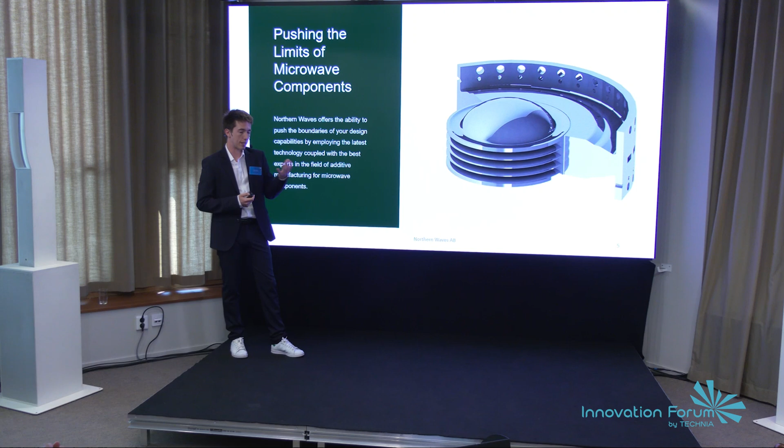So that's why I started the company Northern Waves, to try to push the limits of this system and to try to realize whatever you have in mind, because you are not limited anymore to the design or to the traditional manufacturing techniques. You can have new shapes, you can have new possibilities that come out of your mind that were not even possible before. And many of our clients, we're working with aerospace companies, also defense, like Viasat, Ericsson here, Saab, Fraunhofer in Germany, and also with a lot of universities that are pushing and actually innovating in the European framework.

The products that we're offering now are a combination of different metallic components. So we're covering geodesic lenses for 5G and 6G networks. We're also doing horn arrays and geodesic horns, mainly for aerospace and then different sectors. We are doing a lot of ad-hoc components. Since we are doing additive manufacturing, we can be quite adaptive to our clients' needs. And we're also doing a lot of waveguides for testing facilities.

What we are offering as a company is, apart from whatever you have in mind, try to build it. We are adapting components that you already have in your product line from traditional techniques to additive manufacturing. We are using cutting-edge technology to create and to craft these designs. We are also designing from scratch. So if someone asks us, okay, we need to have this component for this specific application, we are designing and covering from the simulation of the electromagnetic to the mechanical design. We are also building and testing. So we offer the whole process.

Now, I would like to jump on how the components are done now. There are three main techniques. One is subtractive, which is the typical CNC milling. You have a big block of metal, and you start cutting the material. This is well spread. You have a lot of different materials. It's well established in a lot of different sectors, but it's a lot of material waste because in the end, you have a big block of metal and you start cutting and making a lot of waste. It is limited in terms of design complexity, and this is the worst part of this technology. You are putting constraints on the designers, so you are not innovating enough.

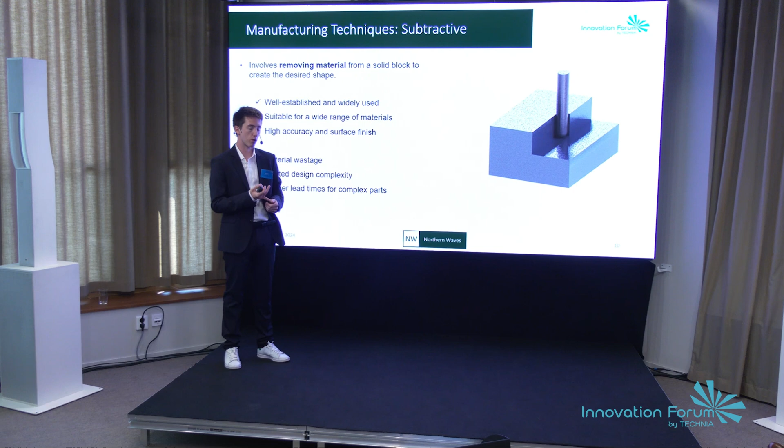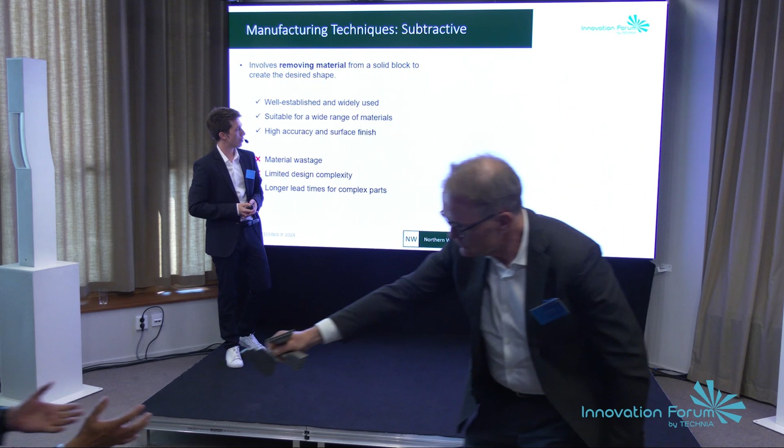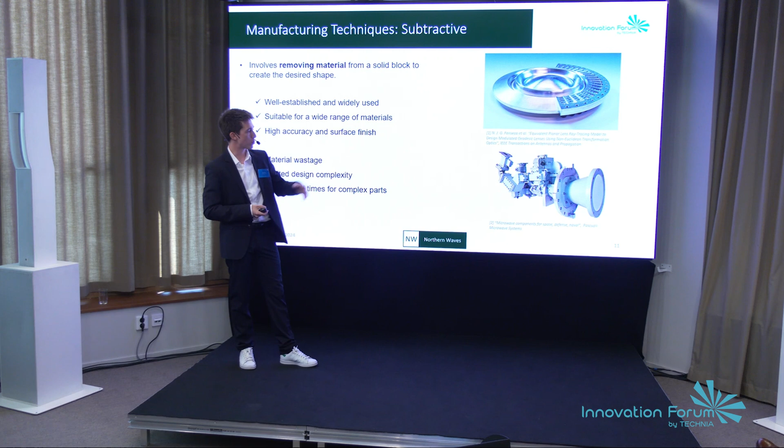Next technique is called casting. It is well spread. Basically, you have some mold where you put some melted material inside, and it solidifies to create the desired structure. You have a lot of different materials, you can use plastic or you can use metal. But the problem in this technology is the initial cost of the tools are really, really high, so if you're not going to make millions of units, it's not really your choice.

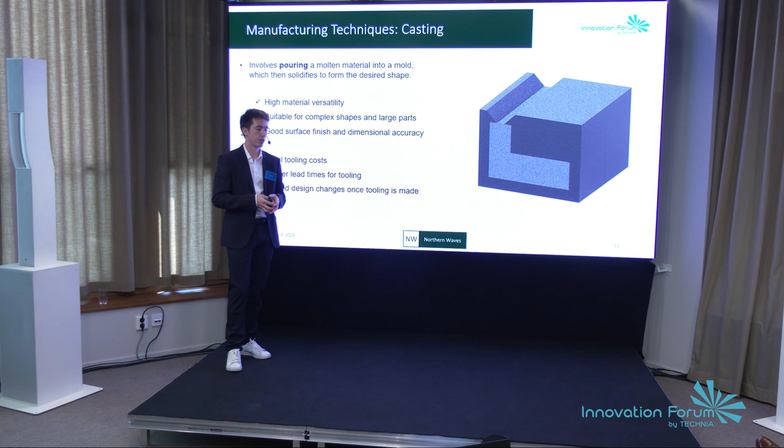And finally, the technology that we're expert on is called additive manufacturing. In this case, you don't have anything on your building plate, on the platform that you're building. You start adding by layer deposition of different materials, dielectric or metallic, and then in some way you are solidifying or bonding these structures together. It is way faster than other technologies.

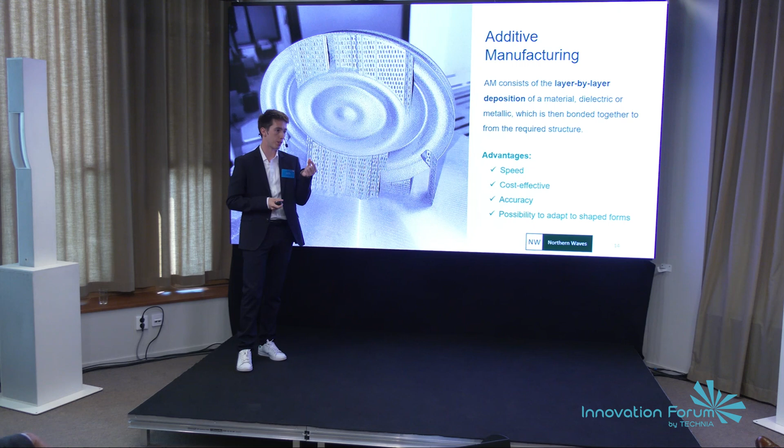It's also cost effective, it is accurate. As you can see in some prototypes, you can achieve things really tiny, like 100 microns minimum feature. And the best thing is that you can adapt to shape forms. So in this case, this antenna is completely lightweight because you are adapting to the cavity that is inside. I will focus on this example later.

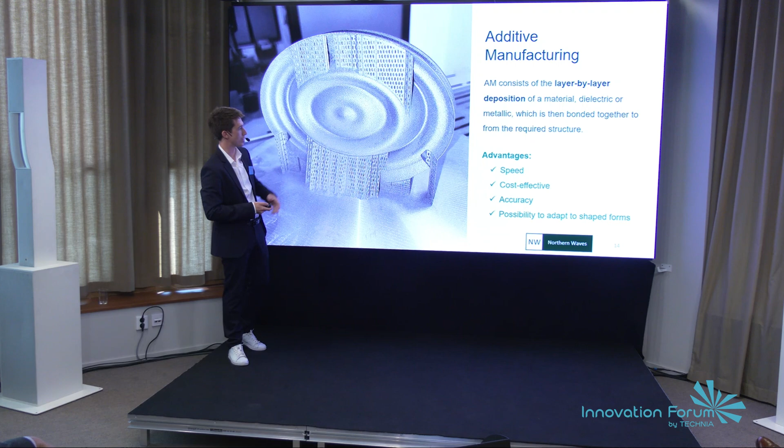There are three main trends in the technology of additive manufacturing for these communication devices. You can use it for graded-index lenses with metamaterials, like this one on the top. The problem is once you go into higher frequencies, such as the industry is going now, you're having losses, and this is not good for the performance that you need to have on the system.

You can also have dielectric things that you, after that, coat, or you can apply some kind of metallic solution to make it conductive. But again, if you go into higher frequencies, or if you want to send it into space, you're having outgassing, so you're not dealing well with environmental constraints. So our expertise is on metallic-only solutions because we enhance the performance of the mechanical structure, and we're also avoiding all kinds of dielectric losses associated with the technologies.

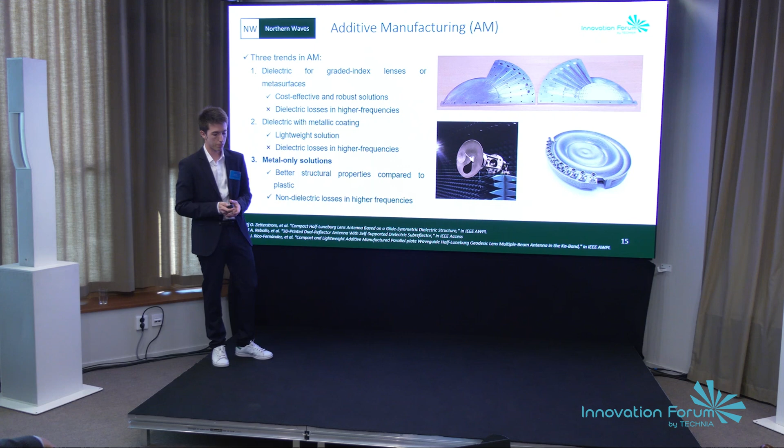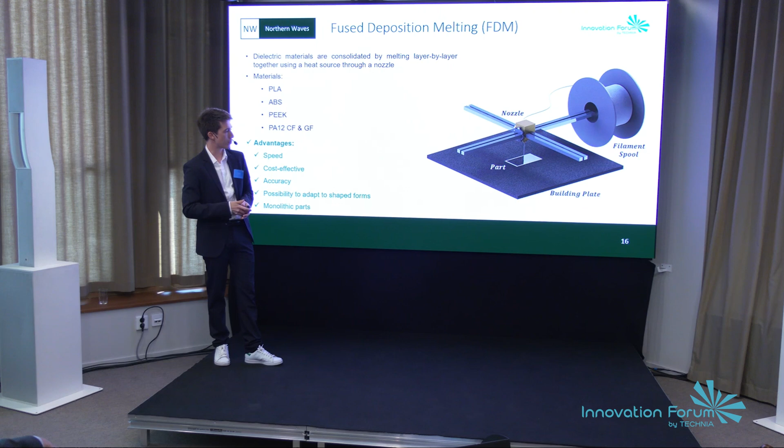This is the most common 3D printing technique that you may know, maybe some of you have at home, which is FDM, where you have the filament spool, and then it's coming through a nozzle and you're creating the part on the building plate. You can create cool things like this dielectric lens. But as I was saying before, this has a lot of disadvantages, like having dielectric losses.

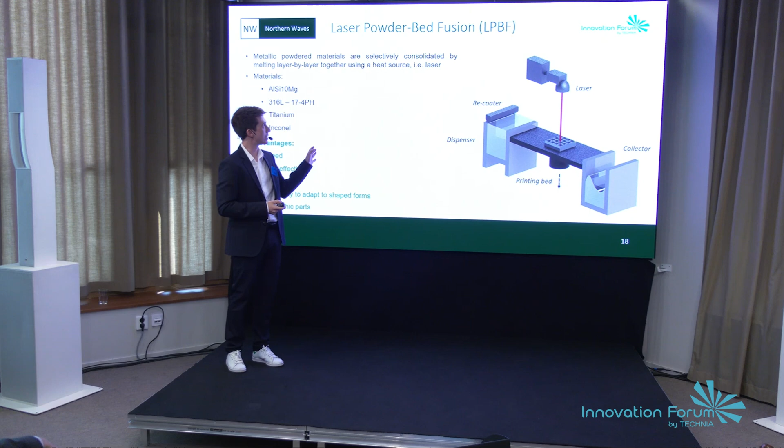So we are focusing on the technology called laser powder bed fusion, LPBF. This is the machine that we're using, where in the dispenser you have metallic powder. It can be aluminum alloy, stainless steel, titanium, or other materials. This recoater tool is creating a uniform layer of around 30-50 microns, more or less, on the printing bed.

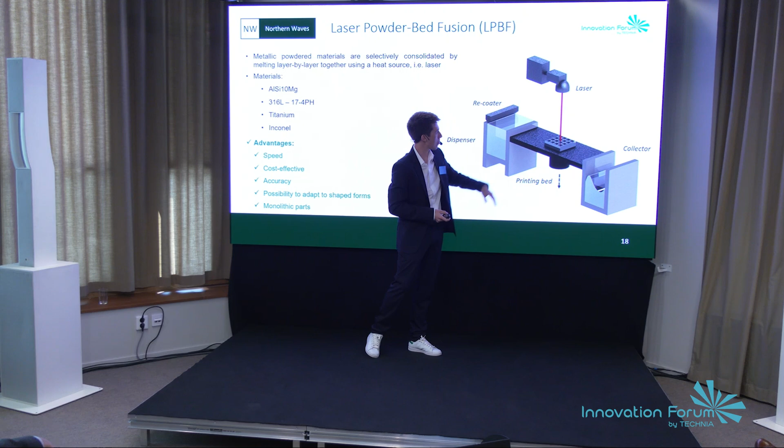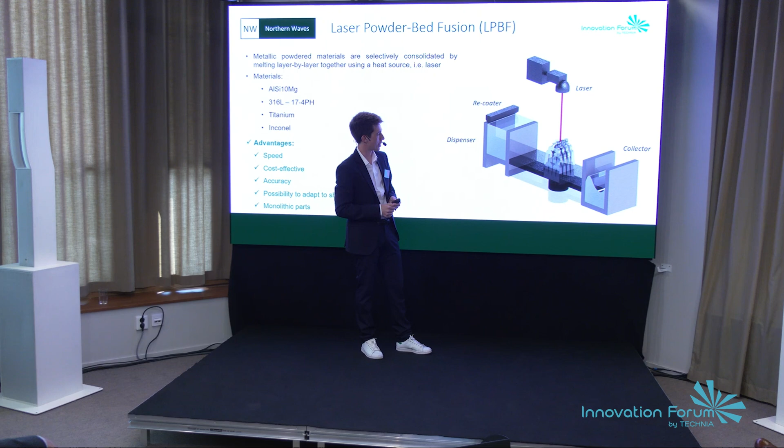Then a laser, which is an energy source, is solidifying and bonding the particles together in the building plate to create one solidified layer. Then the building plate comes down, so you're creating another layer, and you're making the part by layer by layer deposition until you finalize your part. This is the same part I was showing before.

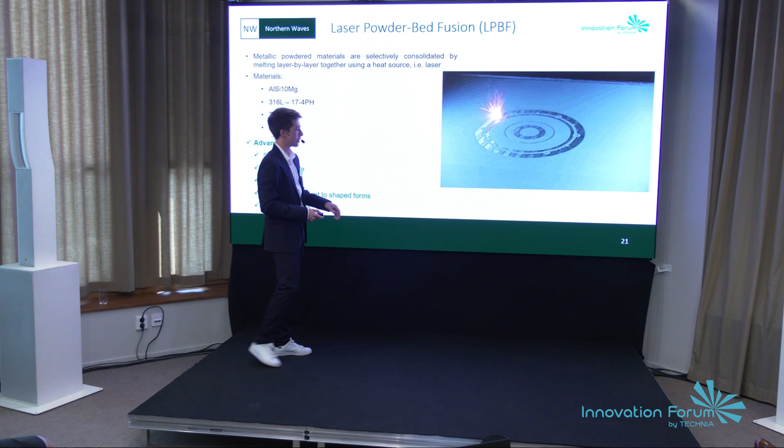And just to give you an overview, this is the real-time process. Here we have in gray the metallic powder, and the shiny part is solidified by the laser. This is real-time.

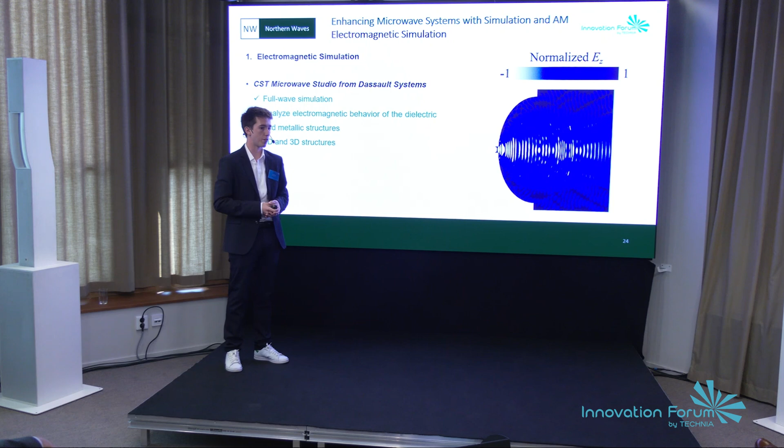So the first step is to start from the theory and the equations, which is not really fun, but that's how it is. We start designing in CST Microwave Studio, where we can do full-wave simulation, or 3D, 2D, depending on the structure. We analyze the electromagnetic behavior of the different structures, and as you can see in that image, you can see the electromagnetic waves propagating. This is an example of the software.

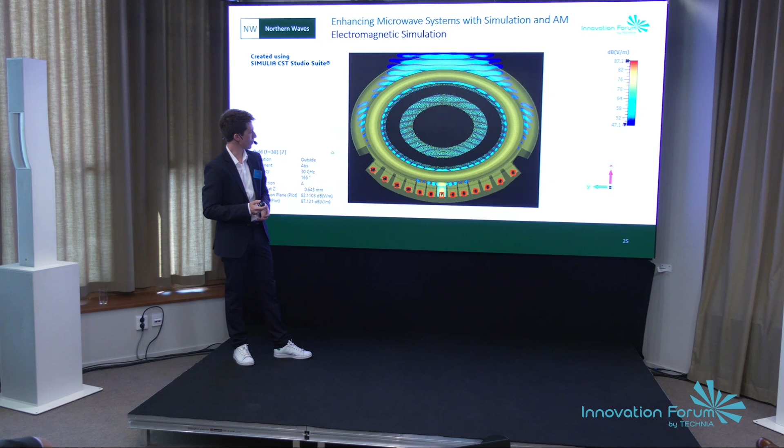Once you develop that model, unfortunately CST is not really available to create a really complex structure, so we jump into SolidWorks to create the actual CAD design, because it's easy for us to design this vacuum or electromagnetic model. As I was explaining before, we can create 2D or 3D structures. Once we have this electromagnetic or vacuum model, this is the cavity that is going to be later inside the metallic box, and we create the mechanical model.

As you can see in the image, this seems quite lightweight because it's conformal to the shape of the cavity I mentioned before. In this case, we're again performing this in SolidWorks from scratch. We're creating the whole assembly with the different connectors and everything.

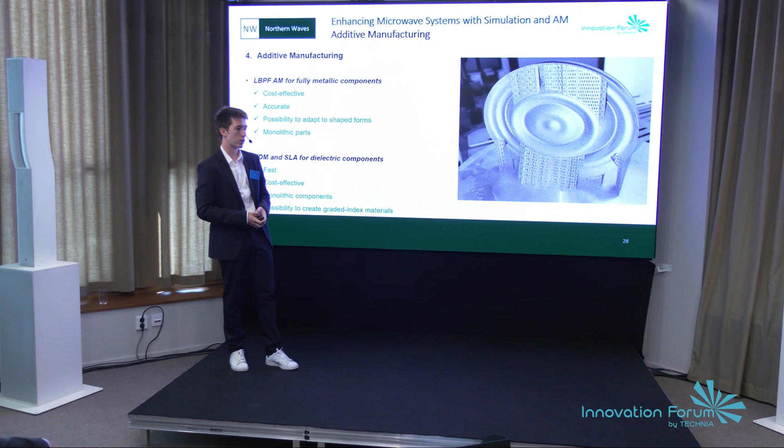Once the mechanical model is finished, we jump into CST to validate the last full wave simulation with the whole model. Once this is done, we jump into the actual real world, so we manufacture the things with LPBF. If we want to do metallic components, as I was saying before, we're using this LPBF technique, and if we're using some dielectric components, as other companies are doing, we use FDM or SLA.

Once the manufacturing is done with all the supports and everything, we need to do the assembly. We typically do some post-processing to reduce the roughness, to improve the quality of the surfaces, or maybe to do some assembly. In this case, we were putting all the connectors with the threading and also doing some blasting to reduce the roughness.

Finally, after that, what you need to do is the experimental validation, because it can be pretty funny, it can be pretty beautiful, the prototype, but you need to test it. And if it's not working, you need to build something else.

So we measure the scattering parameters, that is how much energy is propagating, how much energy is coming back from the system. You also do the radiation pattern, so this is how the antenna is radiating, which is the shape that this antenna is creating. We typically do that in an anechoic chamber, which is that thing with the cones that you can see in the image. Finally, which is really important, you validate with simulations to check that everything is performing nicely.

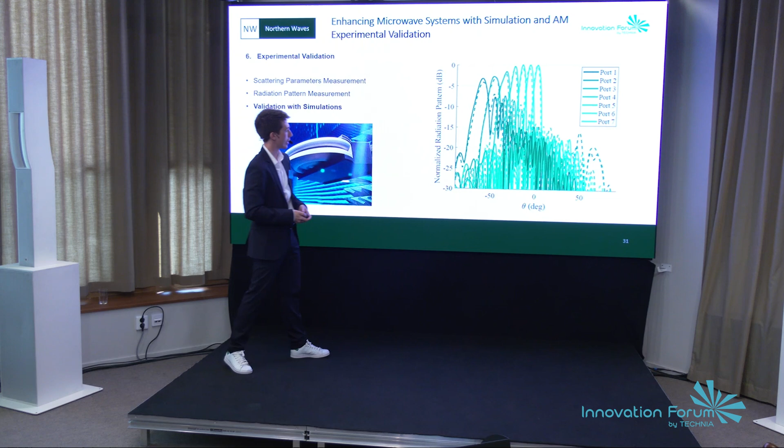So in this case, these are the antennas I was explaining before. Here we had in solid lines the simulation, and in dashed lines the measurements. Each of the different ports was creating a different beam, as I was mentioning before. And here is the 3D pattern, showing how each different beam creates a different way.

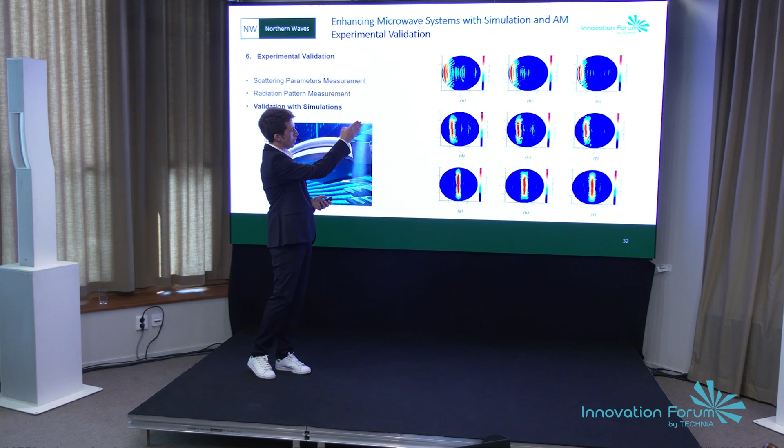Now I would like to explain some examples of how we develop this innovation with additive manufacturing for some clients. We started first with the European Space Agency to develop a half-Luneburg lens, which is a compact antenna or system that, as I was explaining before, can create a different beam in a different direction, so they can use it for scanning.

This is the idea of the model. Each of the different ports, as we can see here from the system simulation, creates a different beam so that you can scan from 0 degrees to plus 60 degrees. This is pretty nice for them to follow LEO satellites in the constellations. And this is the 3D model of the cavity or vacuum model.

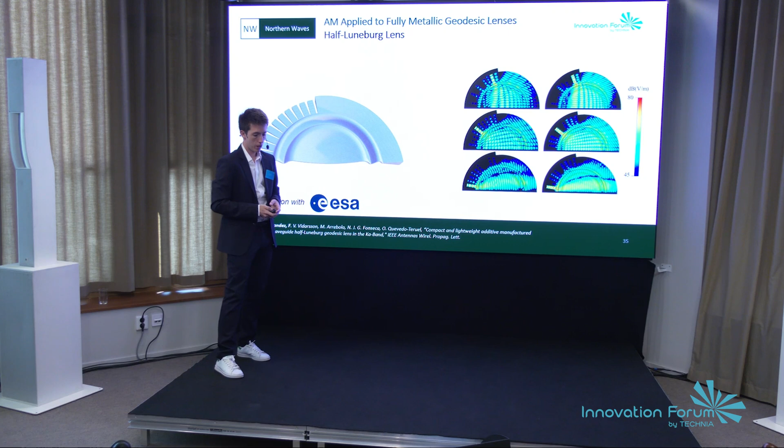But they had a problem because they started this project before working with us. They were doing this prototype with milling, putting two parts created by this subtractive technique with a top and bottom plate that later on they assemble with a lot of screws. As you can see in this image, they were having some misalignment errors in the assembly.

This misalignment can create a degradation in the performance, and it can also create leakage. So all these things are reducing the performance. Basically the problems they were having were misalignment, leakage, and high sidelobe levels. This means that the radiation pattern was pointing in different orientations than desired.

So what we did is we started from the same vacuum model, so we didn't want to change anything. The idea was, okay, if they were doing two parts, the first thing is we need to combine them both and take out all the screws.

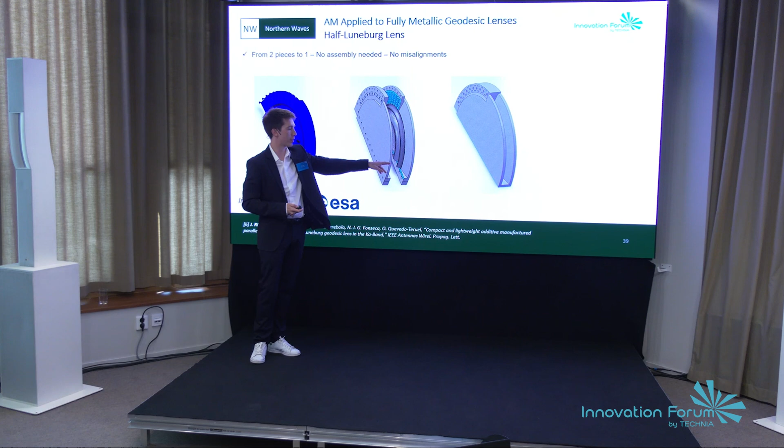Then we create a monolithic version. Instead of having two pieces with misalignment and leakage, we only have one.

After testing this, we created a compact and lightweight model, because as I was explaining before, for ESA or anyone sending something to space, a kilo costs 50,000 euros. So if we can reduce mass, it's a huge improvement for them, and in this case, we reduced the weight

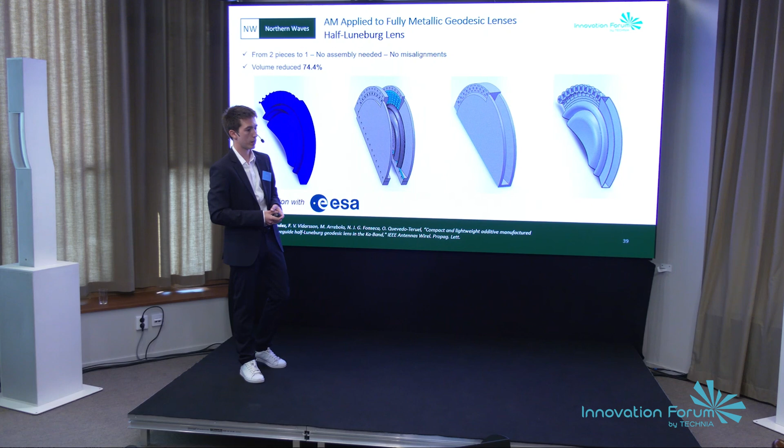by 74%. Here are the prototypes that we built. The first one was the single block, let's call it, 871 grams. But the compact and lightweight version was only 223 grams. We reduced 1.2 kilos from the previous prototype, so they were really happy.

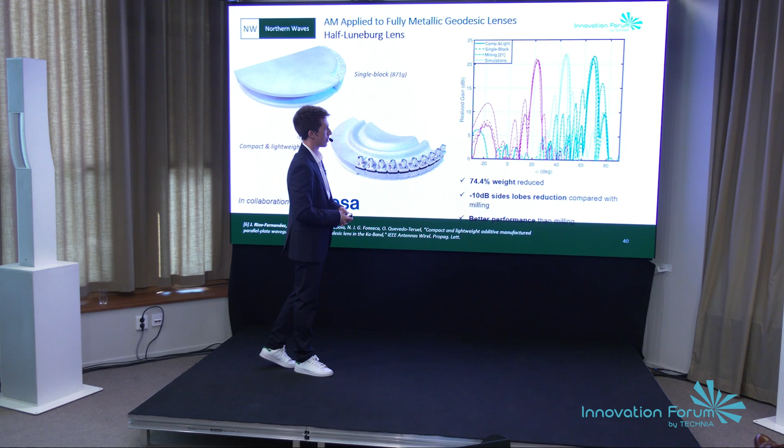And hopefully we can test this soon in space. Not only that, but we improved the performance, because as I was saying before, we were having side lobe levels. These parts here were from the milling prototype. We reduced them a lot, almost 10 times.

So we improved the performance while reducing the weight and also reducing the complexity of the whole system. They don't need to have personnel spending time putting in all the screws.

Another example of how we are combining simulation with AM is a 1-to-8 horn array antenna that I was mentioning before. This is done in collaboration with Ericsson that we're working on now. This is in Ka-band, so around 20-30 GHz.

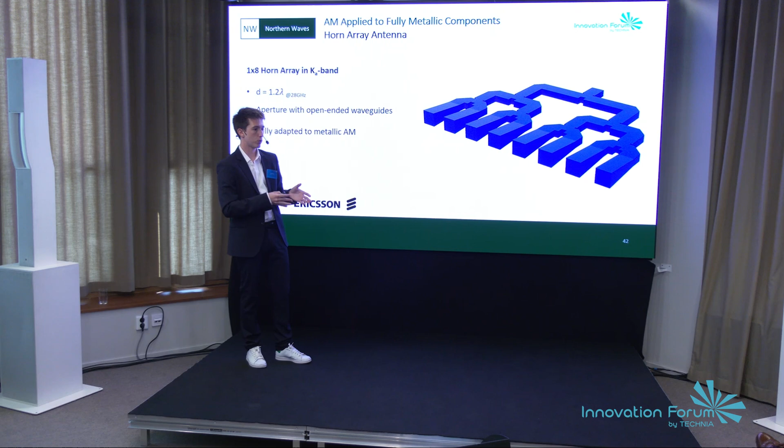That's something regarding 5G. In this case, we were doing a 1-to-8 horn array antenna, so we have one single input and 8 horn outputs. So the simulation comes here, and basically you have your input, and then the power is spread toward the 8 different horn antennas that you have in the aperture.

You might ask why using 8 and not 1 - because you get more directivity, so you are pointing exactly at your customer. You are not spreading the power towards a lot of different directions, and this is where the future of communication devices and systems is trying to go. It's like pointing at each different customer, so you are not spreading power and you are more efficient.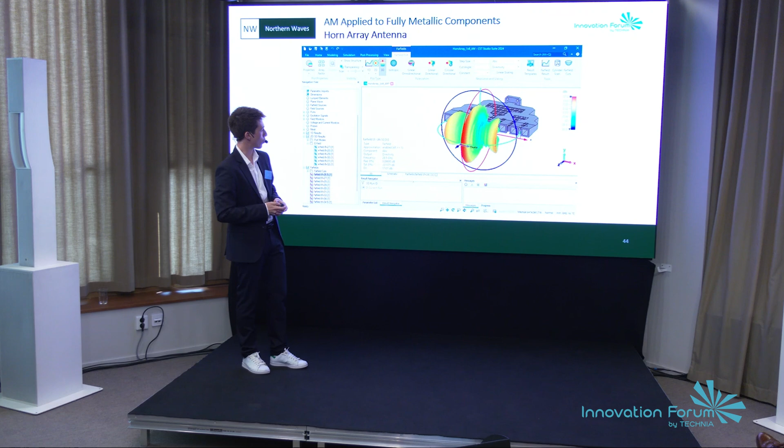Regarding the process a little bit, we did everything, as I was explaining before, with CST and SolidWorks from Dassault Systèmes. We started from the vacuum model that I was explaining before, then we jumped to create this mechanical model, which is basically a lightweight component, conformal to the shape as I was explaining before, and then we were adding the flange to connect with the actual system.

After that, since we have the capability and freedom of additive manufacturing, we were adding this honeycomb structure to improve the mechanical properties, because this is something you can do thanks to this freedom. You're not constrained to have a big, completely solid block.

Then finally, after designing and validating everything, we tested by manufacturing the component that I was showing before with really low surface roughness, which is also the value proposition of the company. We are reducing the roughness in the AM components compared to our competitors.

In order to finalize the presentation, I would like to conclude first by saying that innovation is driven by a combination of new technologies with simulation tools. Even though we are a hardware company, because we are producing things, we cannot live without simulation. We need to test everything before, and we need to design in some kind of digital platform.

We also believe that additive manufacturing is going to be the future for many sectors, but specifically for the microwave sector, we are seeing the trend that this is going to be the future. We can have robust and monolithic components solving a lot of problems, reducing not only the waste, but also the material and the weight in many systems for aerospace applications.